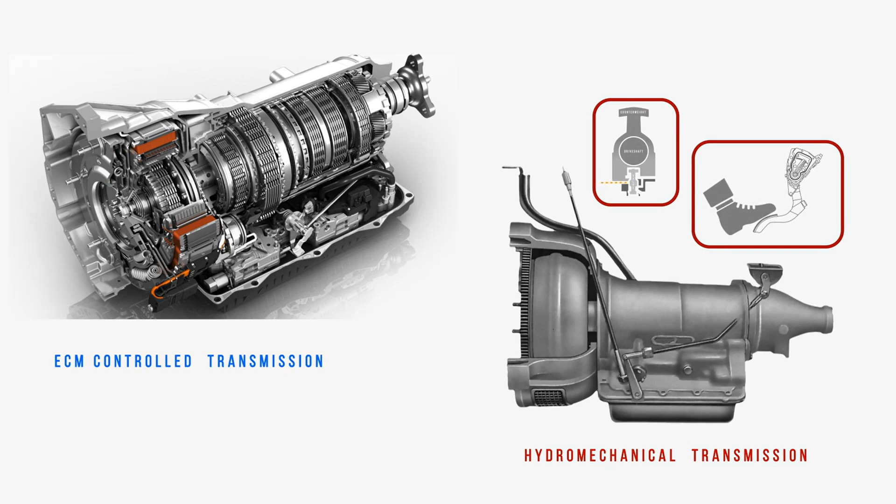ECM-controlled auto transmissions function in a similar way to older hydromechanical types. However, instead of relying on governor speed and accelerator pedal position, they use software programs and a mechatronic unit to determine and perform each shift point. Not only are these newer transmissions more reliable, they require significantly less maintenance over their service life.

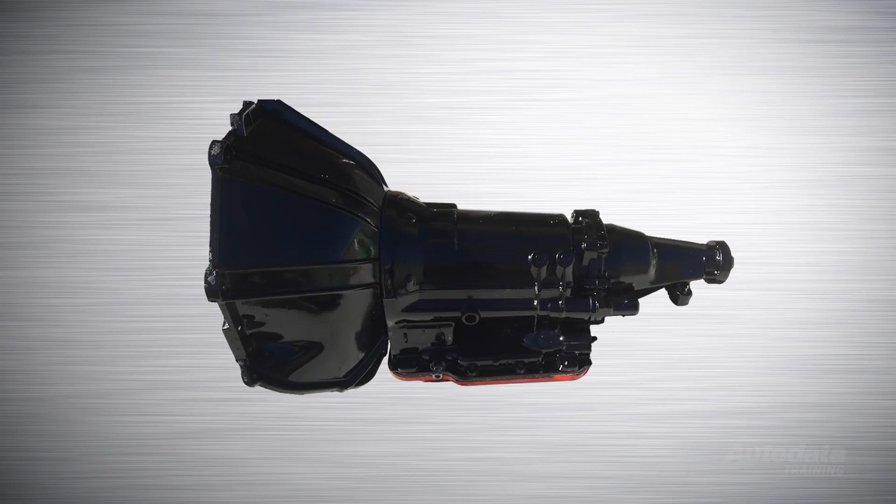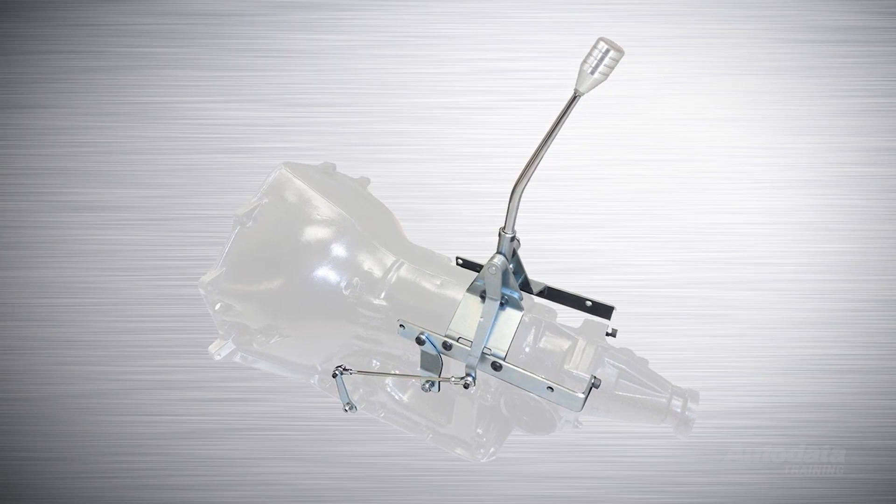For any of us that have repaired a typical hydromechanical transmission, we know that there are cables, rods and linkages that need to be carefully marked and tucked out of the way before disassembly can take place. If we need to remove an ECM-controlled transmission for repair, it is often just a case of disconnecting a harness, instead of the cables and linkages of old.

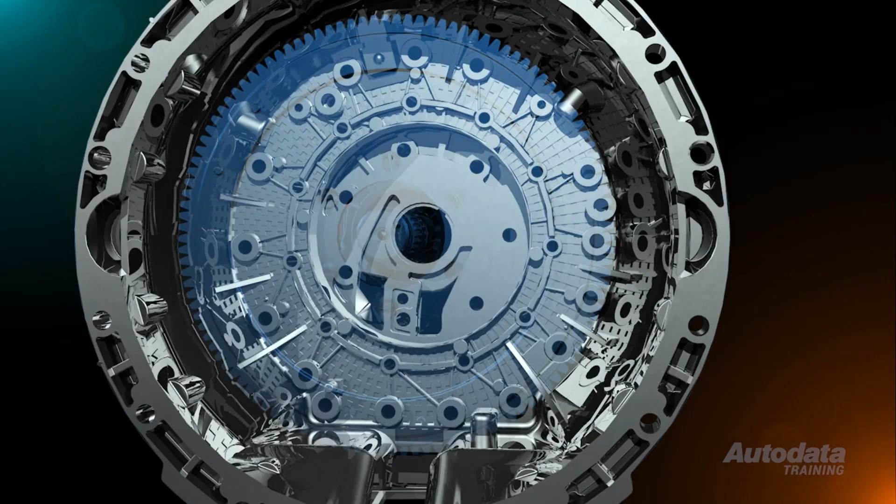Externally, all automatic transmissions look similar, but internally they are very different. Modern electronic automatic transmissions do not use a mechanical governor or a throttle pressure measuring device to control fluid line pressure or operate the shift valves.

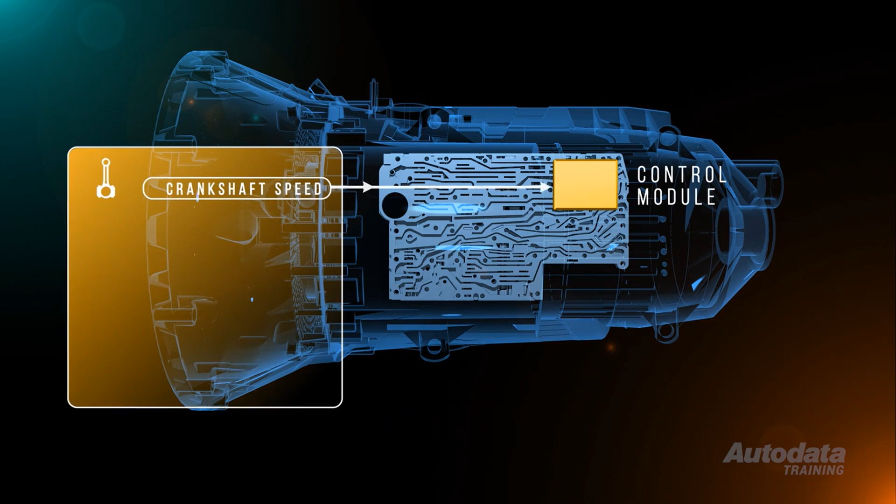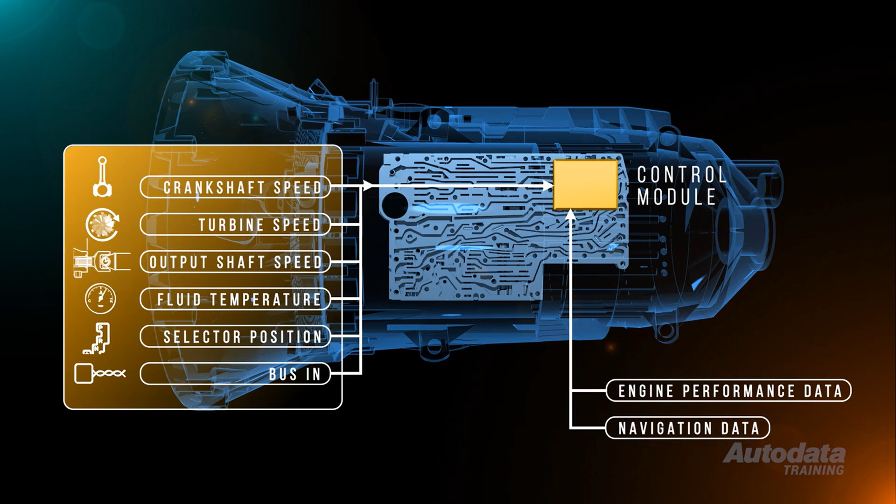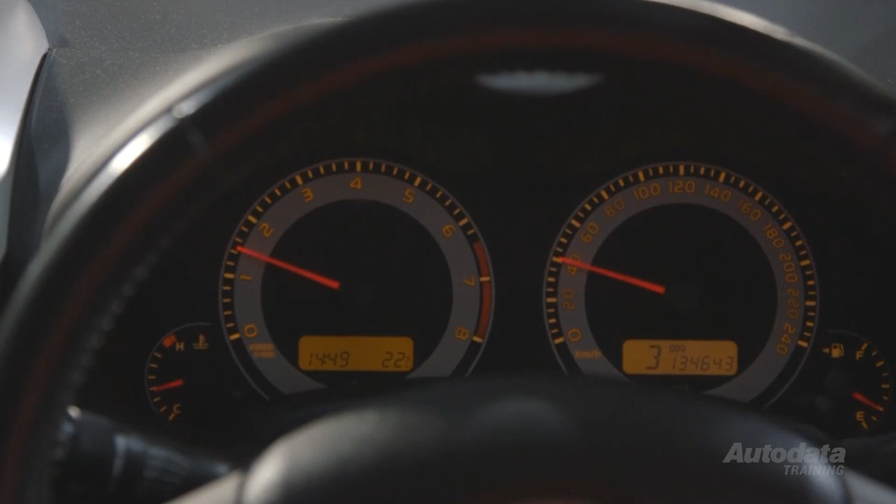Instead, a control module mounted to the valve body uses inputs from a variety of dedicated transmission sensors. Engine performance data and navigation data can also be accessed from the vehicle's onboard communication network. The control module processes this raw data and then selects an appropriate action to perform, whether it's a simple upshift due to an increase in vehicle speed, or a rapid downshift commanded by the driver using the gear selector with sports mode active.

Modern electronic control units offer the key benefit of adaptive learning. This simply means that they are able to adapt their behaviour based on the current mechanical condition of the engine and transmission, the vehicle operating conditions, and the habits of the driver.

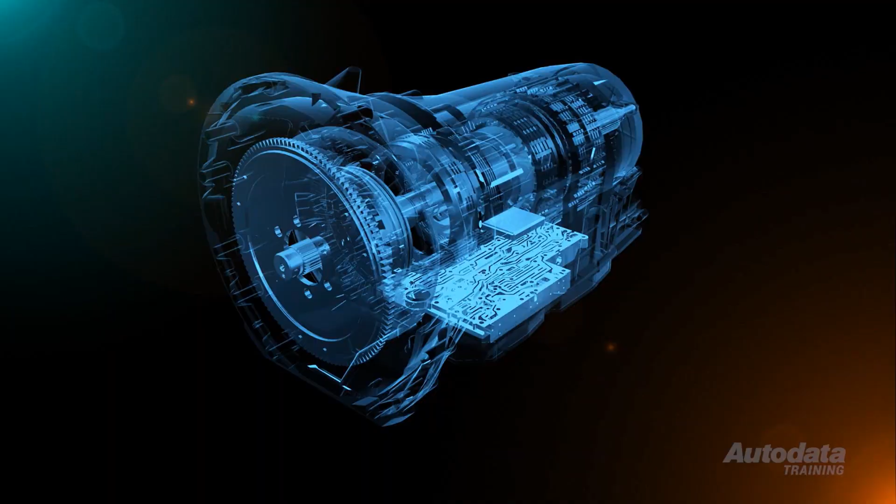Transmissions utilising adaptive learning have a line pressure control system that compensates for the normal wear and tear that takes place over their service life.

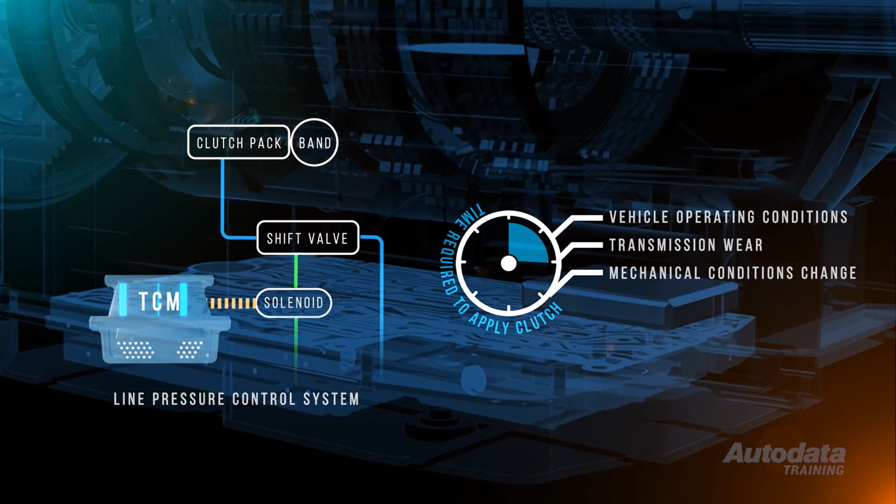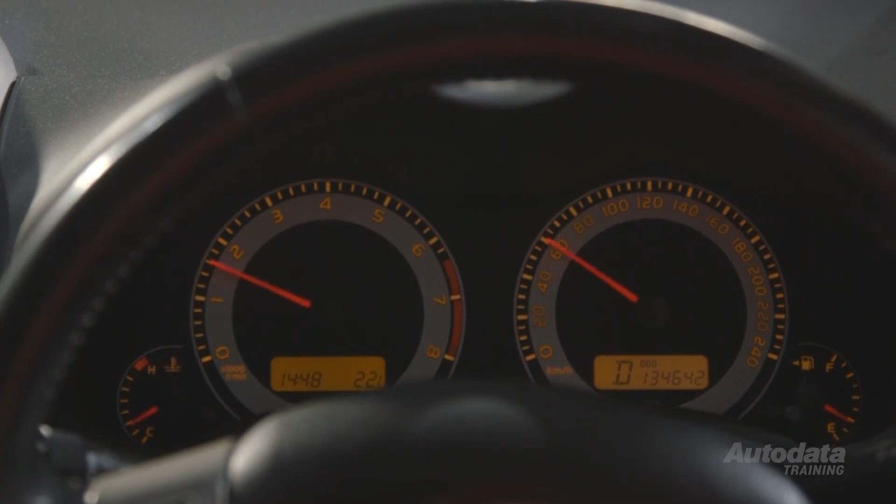As components within the transmission wear or mechanical conditions change, the time required to apply a clutch or brake will also change. The transmission control module monitors input and output shaft speed to determine how much time a gear shift actually takes. If the shift time is too short, the driver will experience a harsh change, while a shift that takes too much time to complete is described as flaring.

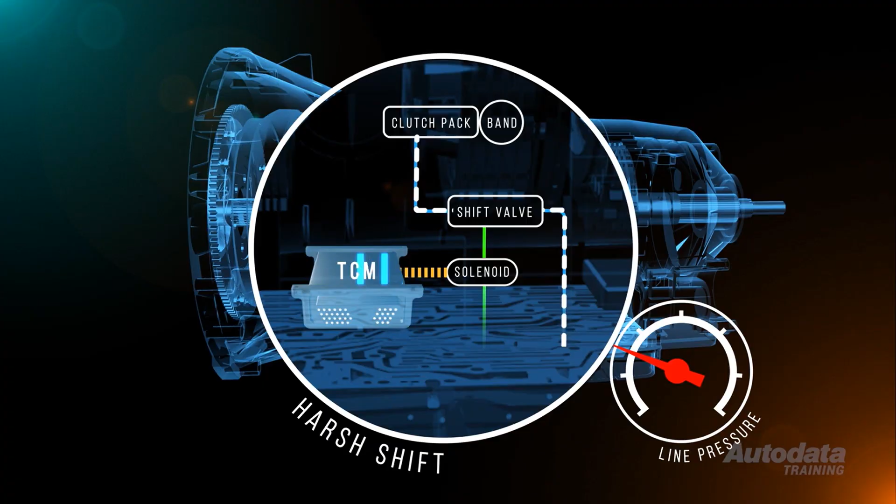The control module will command an increase in line pressure to compensate for a slow or soft shift, and will decrease pressure for a harsh shift. The end result is a transmission that provides consistent quality shifting and improved reliability over its service life.

Adaptive learning capabilities allow for changes in the engine's performance, and it may also learn shift timing and torque converter clutch engagement from the vehicle operating conditions and driver habits.

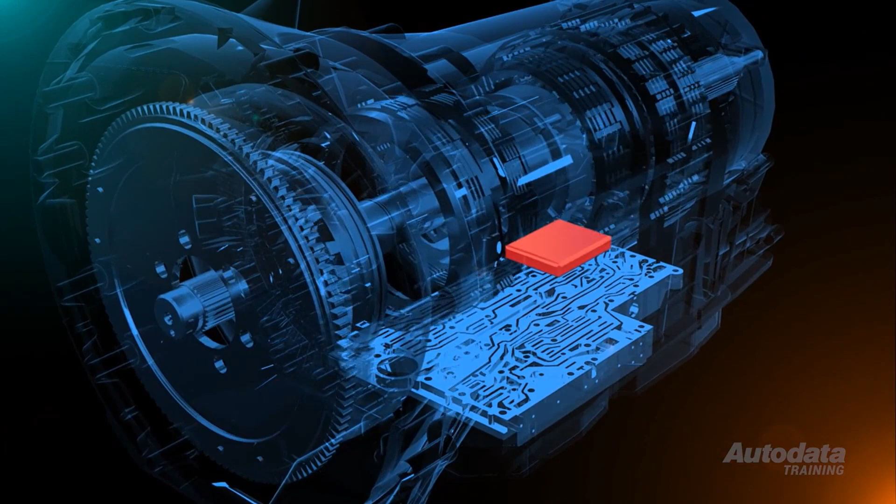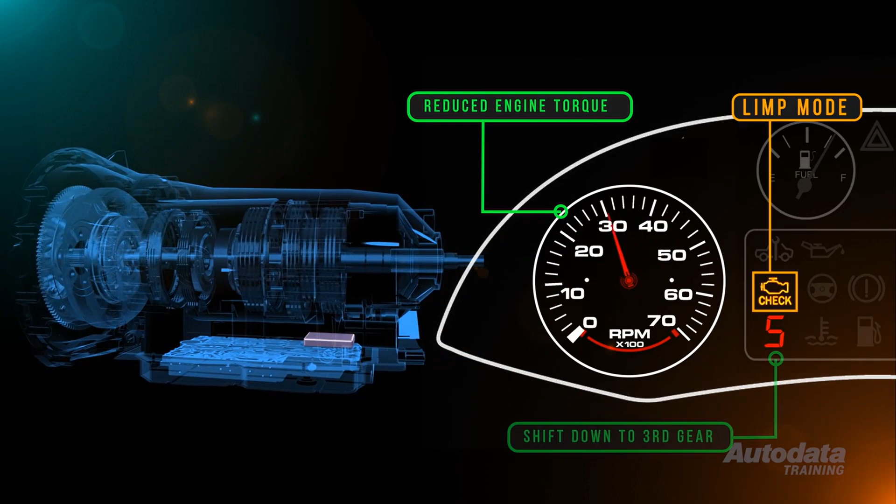If a serious transmission or engine problem occurs, the control module may command a limp or fail-safe mode, whereby engine torque is dramatically reduced and generally only third gear is available. This protection mode allows the driver to limp the vehicle to a repair centre for diagnosis.

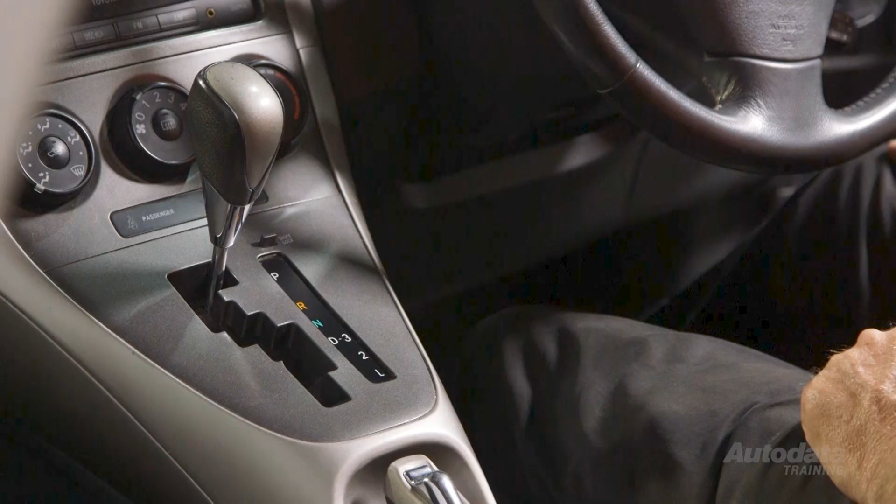An innovative feature of most modern automatic transmissions is that gear selection is detected by an electronic position sensor. Most transmission manufacturers still use a physical lever for the driver to move. However, actual gear selection occurs by means of electric solenoid.

ZF utilises a mechanical shift gate design as part of the electronic selector assembly, which allows the driver to select a gear using a conventional lever that slides over detents. This allows the driver to see and feel which gear the vehicle is in, again similar to traditional automatic transmissions.

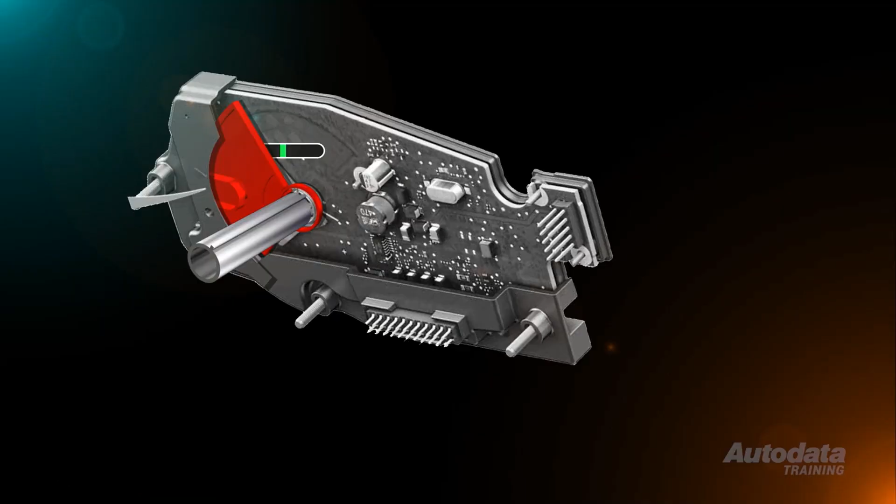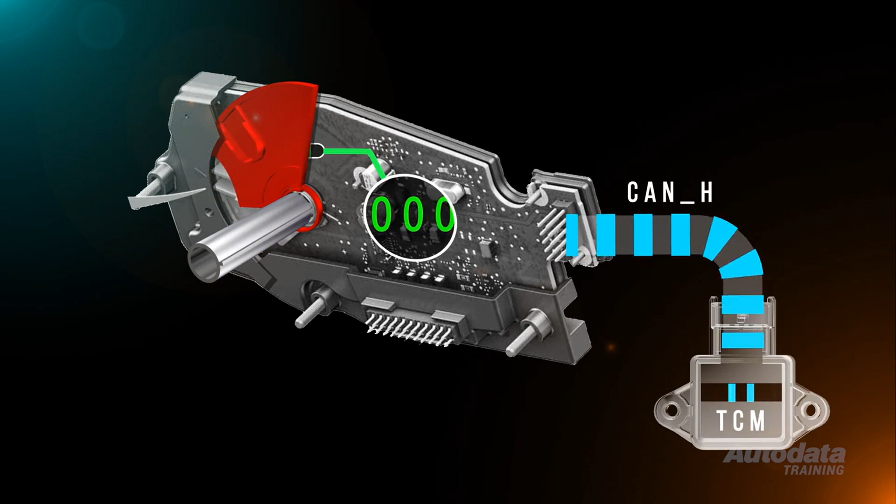In actual fact, a non-contact sensor attached to the assembly detects the selected lever position and then converts the information to digital format. This signal is then sent via a high-speed CAN message to the transmission control module.

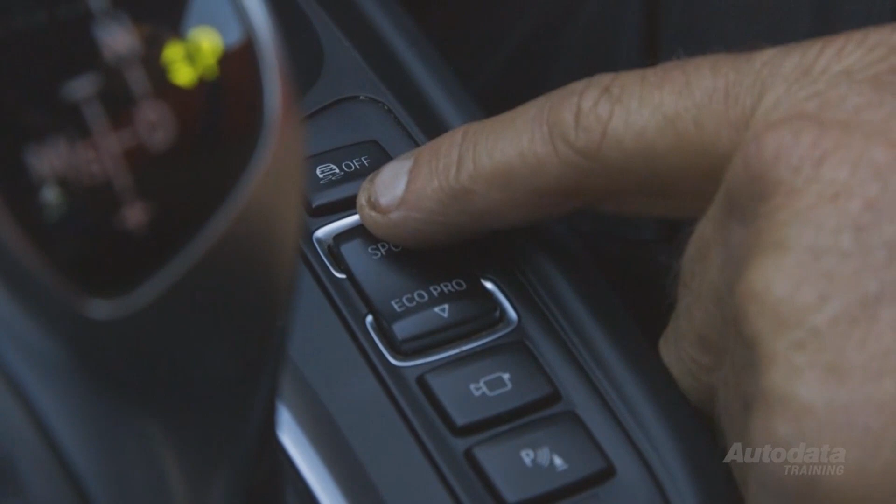Gear changes can also be performed in some vehicles using an operational mode known as Tiptronic. This mode is used by the driver to shift up or down gear ratios sequentially, without waiting for the control module to perform the change.

This shift mode can be accessed by either moving the gear lever to one side of centre and either pushing the lever forward or backward to change gear ratios. Some vehicles have controls for Tiptronic mode mounted to the steering wheel, whereby shifting can take place without the driver removing their hands from the steering wheel.

This shift mode does have limitations. For the sake of self-preservation, most transmissions will not allow a downshift if the vehicle speed is too high. Likewise, it will not allow an upshift if the vehicle speed is too low.

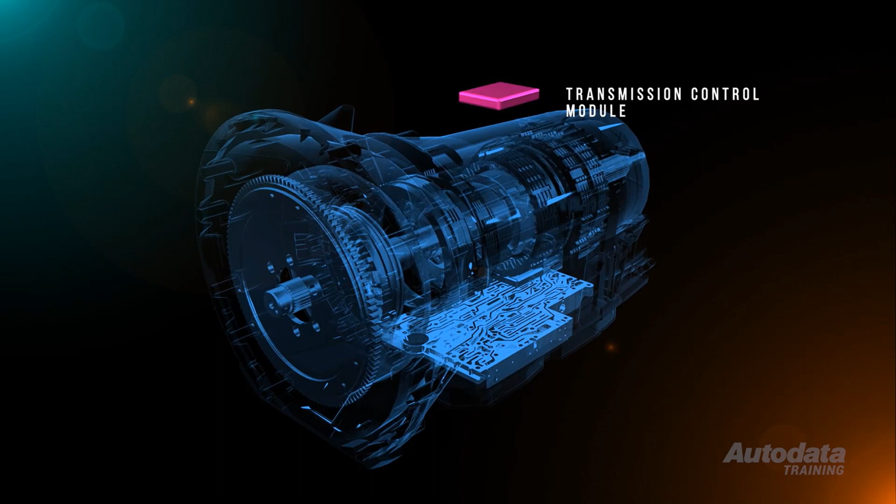Early electronic control systems had their module mounted external to the transmission, or they were integrated with the engine control module and referred to as a powertrain control unit. These days, most transmission manufacturers install the module within the transmission, usually affixed to the valve body. We call the assembly a mechatronic unit.

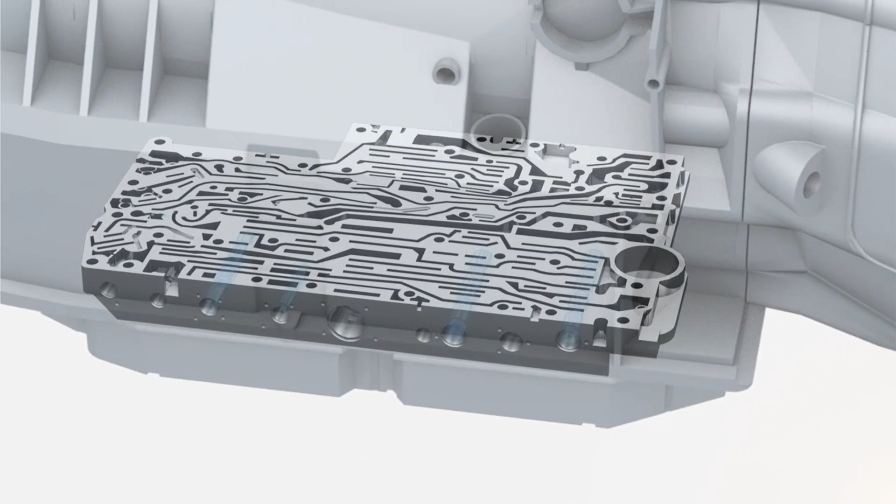The valve body itself is similar to a conventional hydraulic transmission, and it still uses differential pressure acting on shuttle valves to control clutch apply and release servos. But this is where the similarities end.

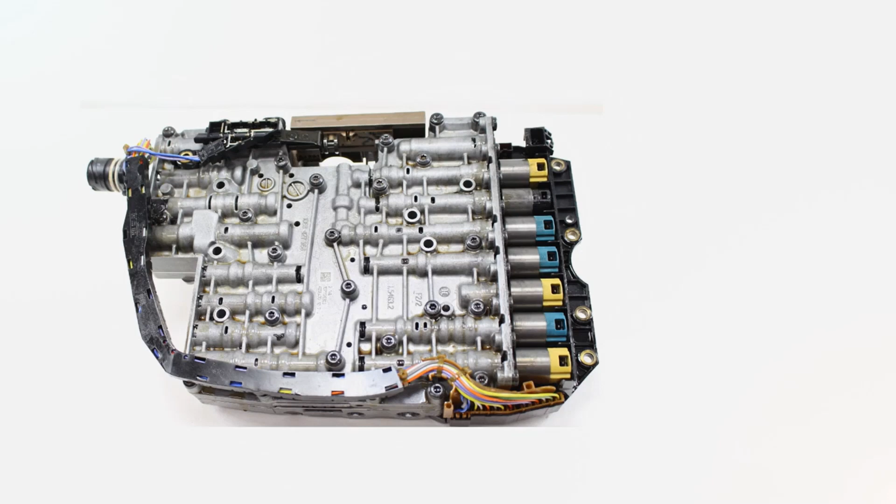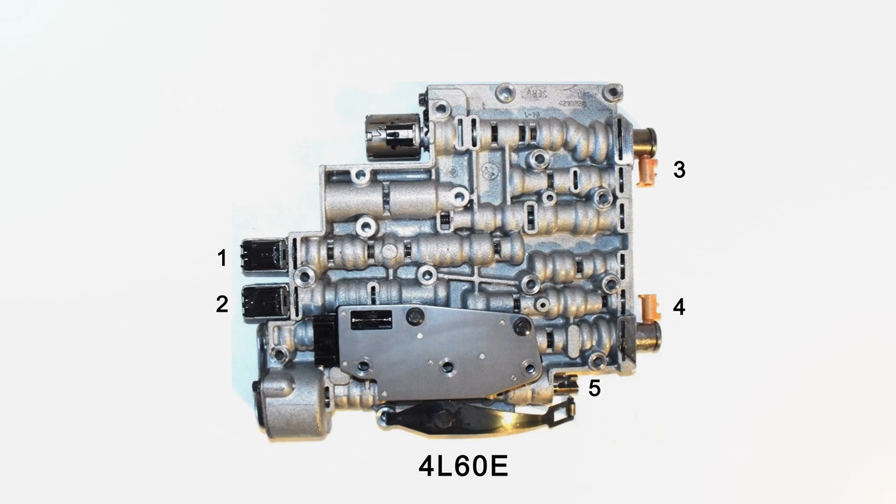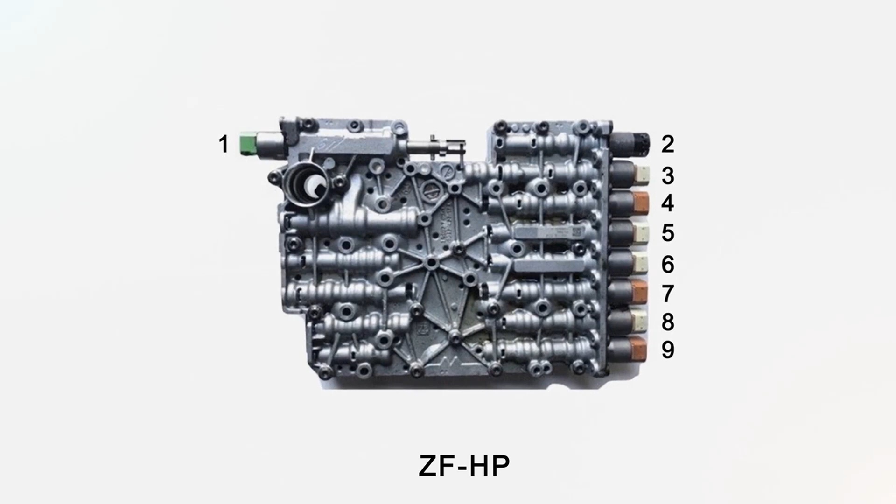The mechatronic unit controls oil flow to and from the shuttle valves using shift solenoids. A 4-speed automatic transmission, like the 4L60E, may have up to 5 shift solenoids responsible for the operation of all gear ratios, both forward and reverse. The more gears an electronic automatic transmission has, the more shift solenoids are required. This ZF-HP valve body has 9 solenoids to service 8 forward and 1 reverse gear.

Shift solenoids operate with spool valves to direct transmission fluid to the clutches, which in turn engage a drive gear. Let's take a look at this in a typical automatic transmission.

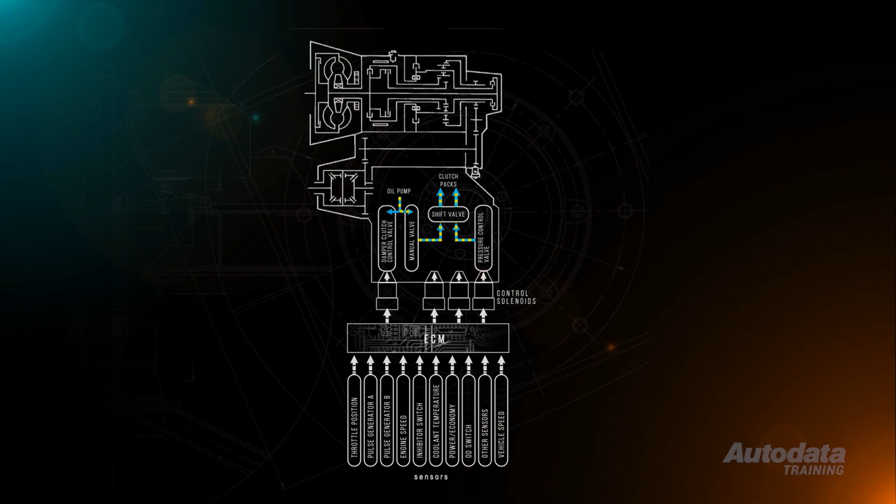When the transmission lever is placed in drive with the vehicle stationary, the ECM is programmed to select first gear. Fluid from the oil pump is delivered to one side of the shift valve via the manual and pressure control valves. This is the fluid that will eventually travel to the clutch packs.

The solenoid and shift valve acts like a relay. When the ECM sends a control command to the first gear solenoid, a small amount of fluid travels from the pressure control valve past the solenoid pintle and onto the first gear shift valve.

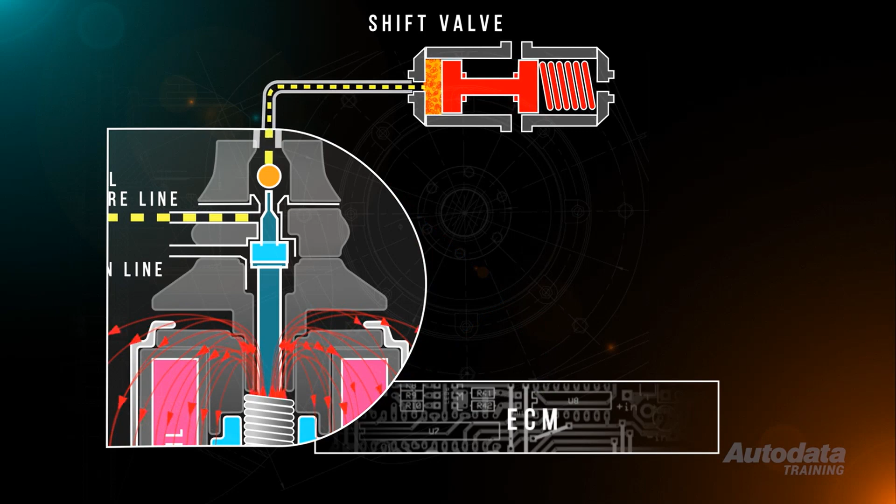Fluid acting on the valve surface pushes the spool against the return spring, uncovering the fluid supply port. Automatic transmission fluid under pressure can now travel from the control valve to the first gear servo and clutch assembly, just like a conventional automatic transmission.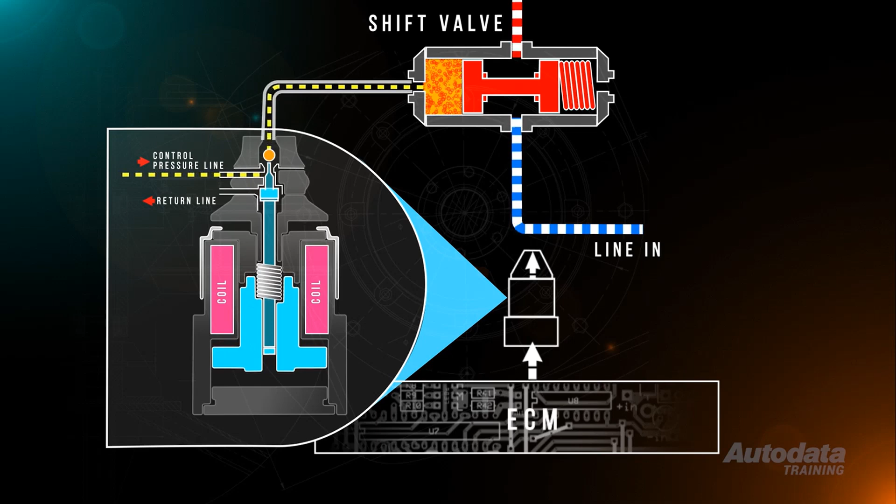As long as first gear is required, the solenoid remains activated by the transmission control module. When the module determines that vehicle speed and load conditions permit second gear to be selected, the control module deactivates the first gear solenoid. The solenoid pintle closes and fluid pressure from the control valve can no longer act on the spool. With low pressure on the solenoid side, the return spring pushes the spool back to rest, covering the supply port. Trapped fluid below the spool is able to bleed back to the oil pan via the solenoid.

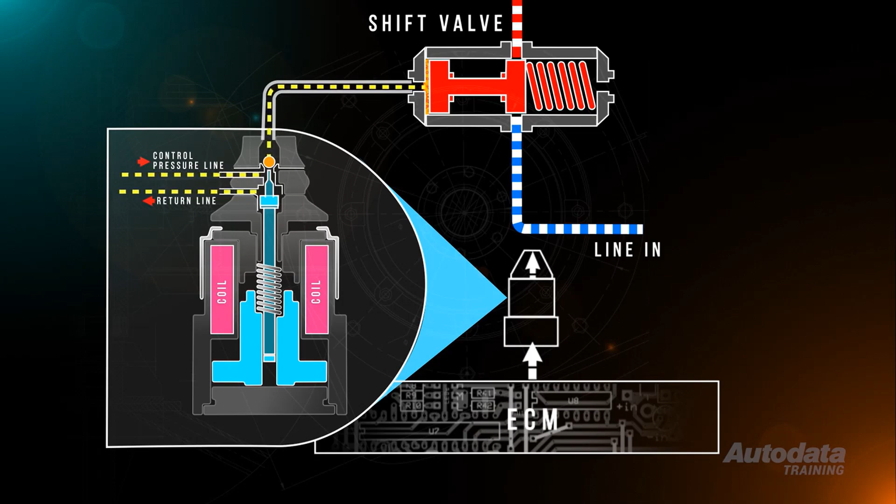When we look at the commands from the control module, we can see that they are in the form of a PWM voltage. Let's watch that again, but concentrate on the voltage at the solenoid.

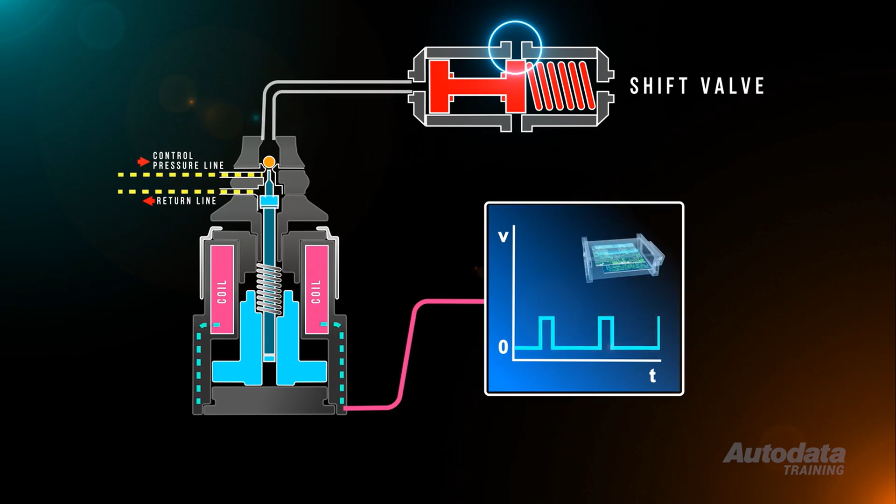In the simple example we are looking at, when the shift valve is closed, the voltage at the solenoid is 0. To initiate the shift to first gear, a pulse width modulated voltage with a relatively low duty cycle is sent to the solenoid. This is gradually increased until the pintle opens, allowing fluid to press on the spool.

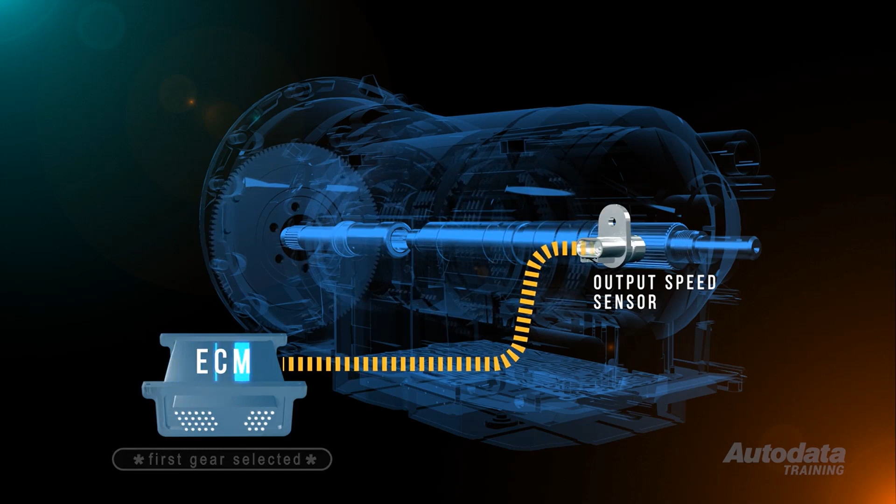Feedback to the control module from the output speed sensor confirms first gear is selected and drive is transmitted through the clutch and gear set.

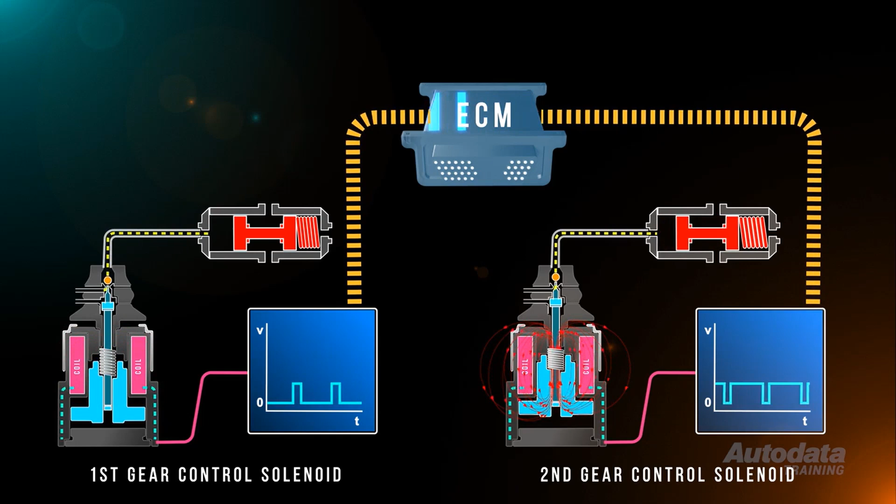At this point, the vehicle speed should be great enough for second gear to be selected. The control module will begin to activate the second gear control solenoid by increasing its duty cycle voltage, while at the same time decreasing the PWM signal to the first gear solenoid. As a result, second gear will be selected while first is deselected. By controlling the duty cycle on both solenoids simultaneously, gear shifting is smooth and precise.

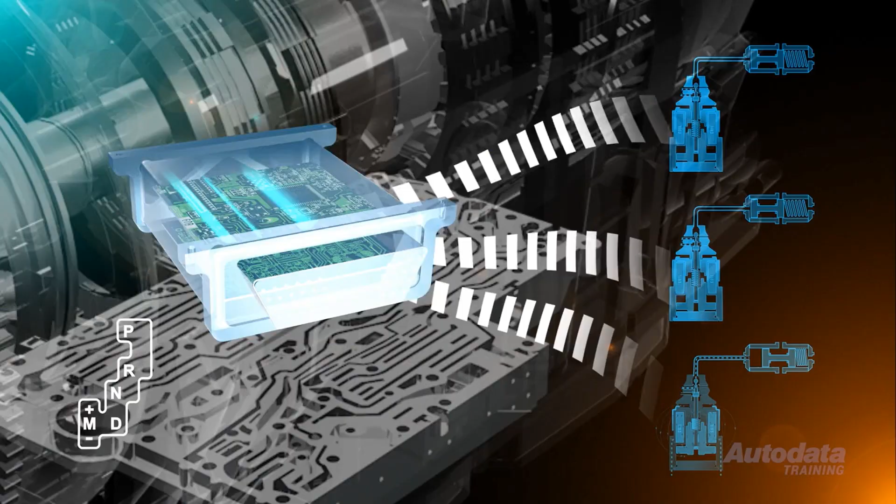By altering the operating speed and order of each solenoid within the mechatronic unit, the control module can perform all up and down shifts as required by the vehicle operating conditions. Modern electronic control transmissions are far more complex than their mechanical predecessors. With an understanding of how they operate, you may find them a little less intimidating.